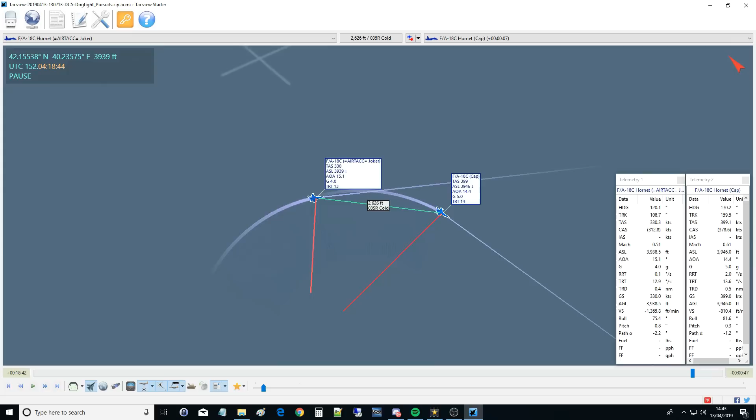Okay, offensive low yo-yo. From memory, I think Joker did this really well. So, the position is we are in a chase, 3,000 feet between us. He's about 80 degrees out of phase with me at the moment. He's struggling to get lead, to get the missile, or to get the guns. He's got to close that up, he's just out of guns range at the moment, basically. And let's send that on its way.

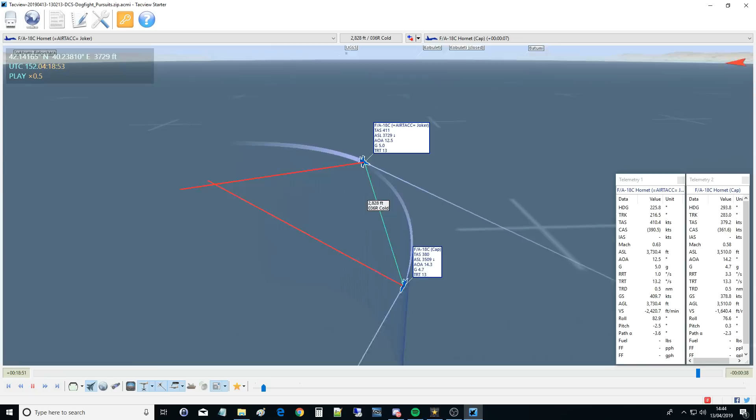So he's going to perform the low yo-yo. He's going to roll right, dip the nose down, unleash that potential energy into turn, and is going to be able to basically cut the corner. That's the way I like to think about it. And he gets the energy to cut that corner out of trading his potential energy for kinetic energy by diving. So there we've got the wing dip.

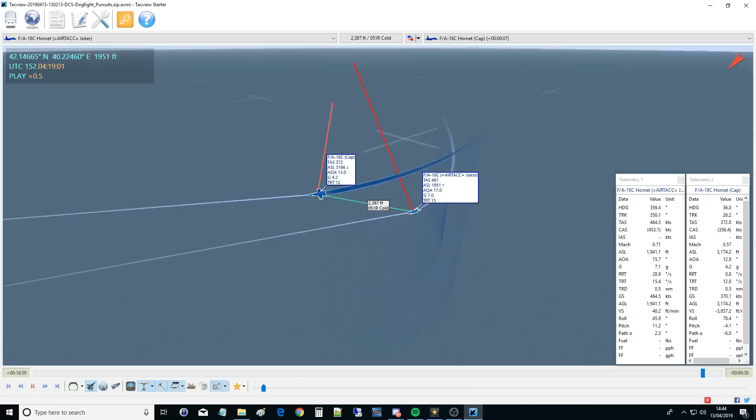Look at the altitude go down. Look at the speed increase, despite the fact that his turn rate has gone up. His turn rate's got all the way up to 22 degrees per second, and I'm stuck at my miserable 12 degrees per second. And he's going to pop up back onto the plane of turn. Like so. He's going to retrade that energy, going to gain that potential energy again,

and he's having to pull 9G here at this point to manage it, but that's just something you've got to do. He's gained all that kinetic energy, and he's got a bit of an overspeed on the go. But basically, that's now a guns kill at 600 feet away. So it's almost like magic. You kind of trade that energy in, and it allows you to close up so quickly. I mean, this was again a bit artificial. I'm not stressing my jet to the maximum here.

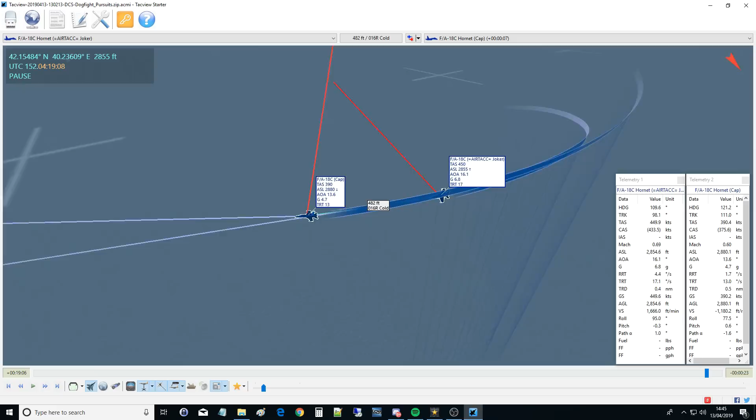I'm not doing a consistent 7G turn, but this is just an example to show how it can be done, and it does work obviously in a max G turn as well. So that's probably what we would consider the most useful out of all of the BFM maneuvers if you are the aggressor and you want to get closer in phase or just closer in terms of distance to your target to get your guns on cue.

Offensive high yo-yo. So if you like, it's kind of the opposite to the low yo-yo, but the mechanics work differently. So who does it? The aggressor. The condition is that the aggressor is fast and in a lead pursuit. Now, personally, I found that this kind of works in lag pursuit, and we'll show in a minute it working in lag pursuit with equal energy, but the official version is that it is when you have overspeed on the hostile.

So the action: the aggressor loosens the roll and pulls up to increase altitude. So because of that, we're obviously trading our kinetic energy, our airspeed, which goes down, but for what we lose in the airspeed and the kinetic energy, we gain in the ability to turn. And so we can turn all of a sudden and cut the corner. We're covering half as much distance as this guy here. And then when we dive back down, we can dive down much closer in phase, and only a few hundred feet, rather than the several thousand feet, back onto six.

And the effect is, despite a temporary lack of airspeed due to the much tighter turn, the aggressor is now closer to the defender and at more suitable speed. Again, because officially we're coming in from a higher speed for an offensive yo-yo. And this also is good for preventing a turning overshoot as well. So we're going to show an example of that and show that we can actually do it from a lag pursuit as well, but it's primarily for a high aggressor energy lead pursuit.

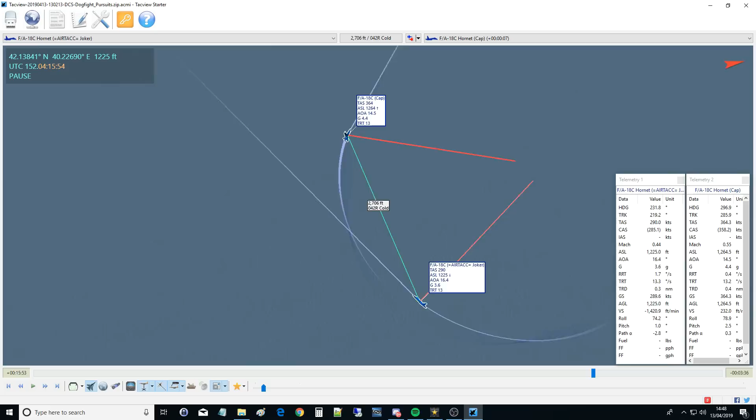So the situation is Joker is chasing us. He's the aggressor. We're about 70, 80 degrees out of phase. Nearly 3,000 feet between us. We're too far away and I'm too high energy, because we're just pretending I am, so that he can't get a lead and he can't shoot at us. So he is going to do his offensive high yo-yo. He's going to increase in altitude, essentially turn into the middle of the turn. And for what he loses in kinetic energy and speed, he gains more in the long run by being able to turn tighter, cutting the corner and lessening the distance he has to travel.

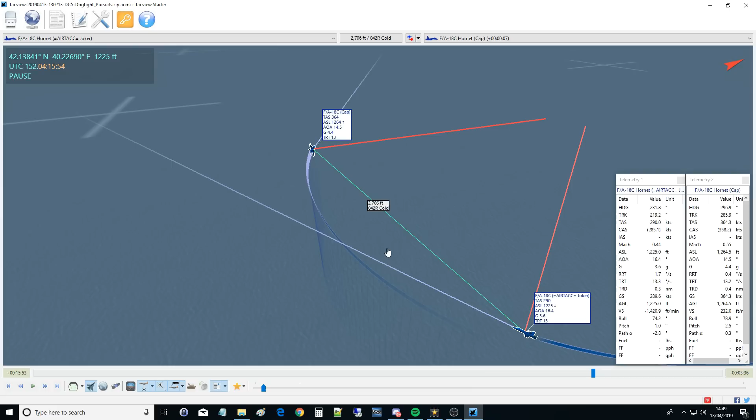And when he comes back down, he trades his potential energy back into kinetic. He's going to fall right on our tail. So a lovely maneuver. Basically just the opposite to the offensive low yo-yo. So let's set that going. So he's frustrated at the moment. He can't catch up. In fact, he's getting left behind. I know I'm only doing 4G, but it just makes it easier to show the move like this. In reality, we'll probably be doing a 7G or a 6G. So he's falling behind. We'll do it at some point.

There we go. So we're unloading some of that roll. We're up. And again, you may have to pull high G to perform this maneuver. And he's yo-yoed over. You see he's lost a lot of speed doing that. He went under 300 knots, and that's just what has to be done. And in he goes now. I did a little jig, a little roll there. I don't think that's needed. I think that was just an adjustment because he was slightly off phase.

2,000 feet, and he's going to have to load that jet right up now. So he's loading it up, loaded the alpha up, loaded the G up, and he's fallen on my back there. And so it's gone from 3,000 feet to 800 feet, a perfect gun solution, 10 degrees, 5 degrees within phase of me. So that's perfect. So if we were doing a full 7G turn, obviously it wouldn't have that much effect, but that shows a good example of how it works.

Right, so defensive spiral. This is a pretty cool one. Obviously, this has to be done at high altitude. Well, when I say high altitude, at least several thousand feet, at least kind of 5,000 feet, I'd say. Who does it? The aggressor and the defender. Now, technically, the defender initiates it and maintains it, and the aggressor is forced to go with it, basically, if he wants to carry on in the dogfight.

So the condition is the aggressor is on the defender's 6, and the defender has got himself where he's low energy, low speed, so he's down to 200 knots. And as the official saying is, out of energy, out of ideas. There's nothing else he can do because he's got no kinetic energy in the bird. What he does, however, have is potential energy in the bag. He has his MGH, his altitude.

So the action is the defender pulls into a diving helical spiral. So basically he keeps turning as he is, but he's gonna rudder his nose right or tighten the roll right so that he's now going 15, 20, 25 degrees down. And he's going to start trading in potential energy for kinetic energy. He's going to increase his speed, and this allows him to unload the jet as well because we can get speed. We can be sure that we can keep our aggressor sufficiently out of phase with the temporary increase in our kinetic energy. So using gravity for the turning energies, that's where it's coming from.

His aim is to keep the aggressor outside of a rotational shooting phase. So that just means keep the aggressor out of phase. Keep him, you know, plus 50, plus 60 degrees out of phase if you can, up to 180 degrees. The effect is the aggressor cannot acquire a shooting solution. He just has to follow him down. There's not really much he can do apart from follow him down, because he can only get the same amount of turning energy from the dive as well. And the situation can be reversed, yes, I'm aware I can't spell, depending who reaches the ground first.

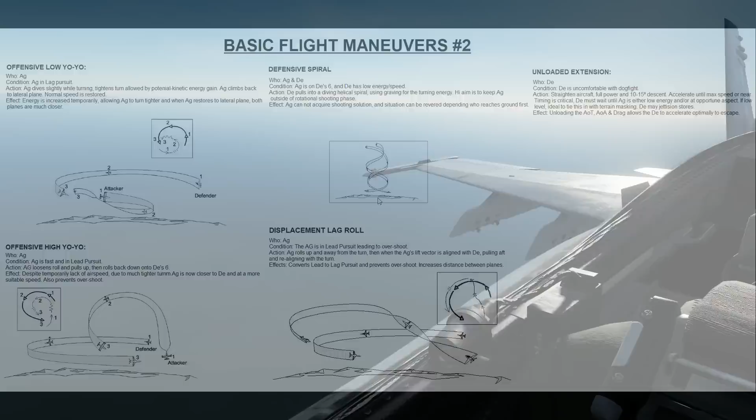I'm the defender, Joker is the aggressor. He's got onto my 6. We're going to have a fake dogfight up here. I'm going to deliberately run myself out of energy and out of ideas. My only thing left to do is to get myself in a defensive spiral where I'm going to use gravity to keep us separated, keep us out of phase so we can't get a gun solution on me until we basically hit the ground and are forced to split. So I'm going to go burners on in right, pull 3, 2, 1 now. I'm going to load up the alpha so that I run out of energy.

Okay, oh, I'm all out of energy, I can't maneuver. So I'm going to put myself in my downward spiral now. Use gravity to help build up the energy, even at the same stick load. And I'm keeping him out of phase so he can't get the shot on. Altitude. We've just got to watch for the ground now. The ground is going to force us to split. 1,700, 1,000. And I'm out of here.

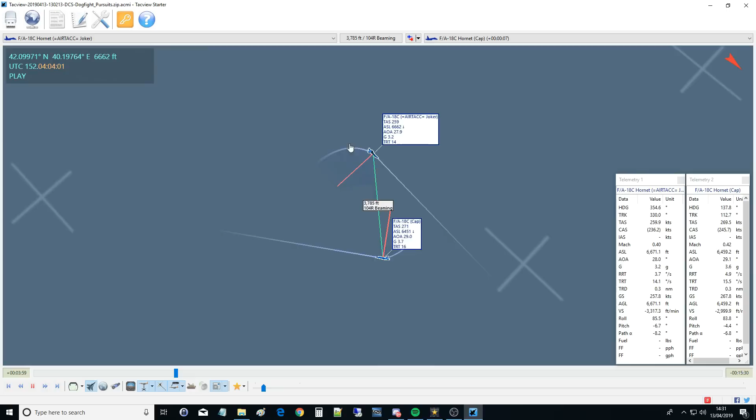Okay, so the defensive spiral. So we're in an artificial dogfight at the moment. We're about 150 degrees out of phase, 120 degrees out of phase. He's behind me. So I've got no hope of surviving this dogfight, and I've bled myself out of energy. I'm down to 265 knots. Don't worry about Joker too much. He's just trying to follow me for this example, but he is representing the threat. So I've loaded up too much alpha, and I'm out of energy, I'm out of ideas.

So what I'm going to do now is put the nose down 15 degrees, or maybe more than that. We're going to use gravity, and we can afford to unload. Because we've got the gravity, we can afford to unload the plane slightly here. So we're going to unload the alpha, increase the speed up to 350 or maybe even 400, we'll see. And what this is allowing me to do is unleash potential energy, put it into kinetic energy, and it essentially allows me to keep Joker out of phase. It doesn't allow him to get a solution.

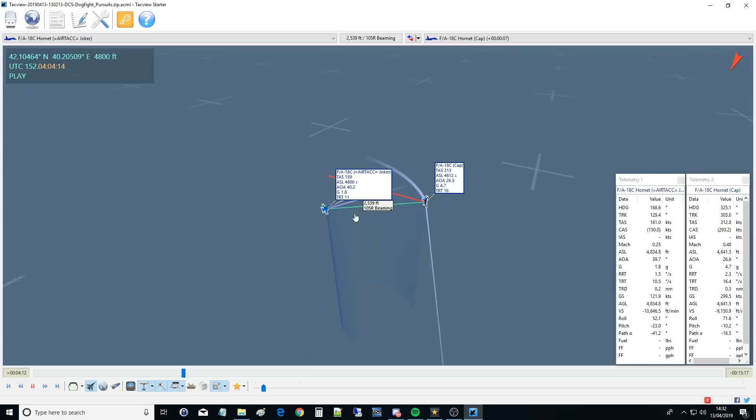Look at him struggle, just trying to keep a lag pursuit on the go here. And he's burnt himself, in this case, all the way down to stall speed. Whereas I've unloaded down to 26 degrees alpha, and my speed is still increasing. Joker's getting his act back together now.

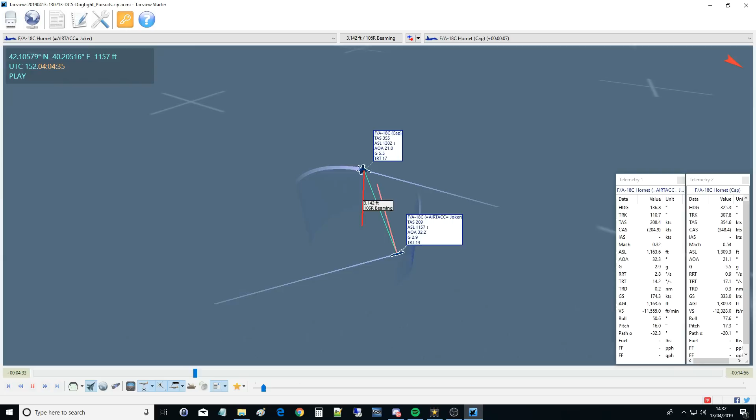It's about 180 degrees out of phase now. So it's a bit of a mistake from Joker for going so slow, but we're not really worried about his bird too much. It's my bird that we're really looking at the moment. So for that whole spiral, I'm not trying to get away in that spiral. I'm just trying to neutralise the hostile.

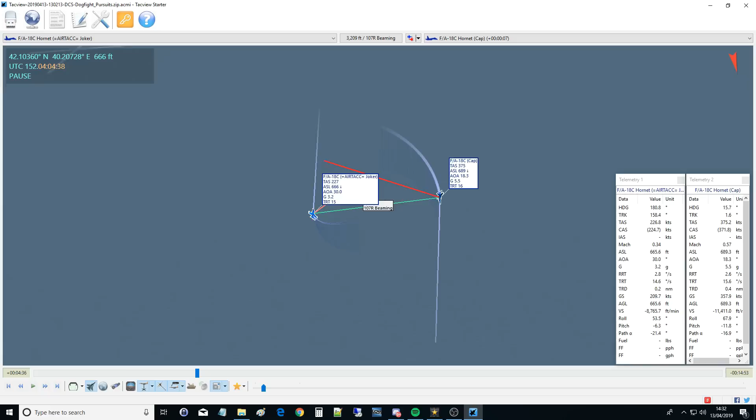Whatever we do, he can't cut in front of me there. He can't really get a lead pursuit on me as such. Can't get a weapons fix. And then we come to the end of the manoeuvre, and what happens is, because we reach the ground, we run out of altitude and hit the ground at different times because we are out of phase here. It means that I've got a chance of getting away. I've got a chance of unloading my plane and getting away. And because he's out of phase, he doesn't have that chance to catch up.

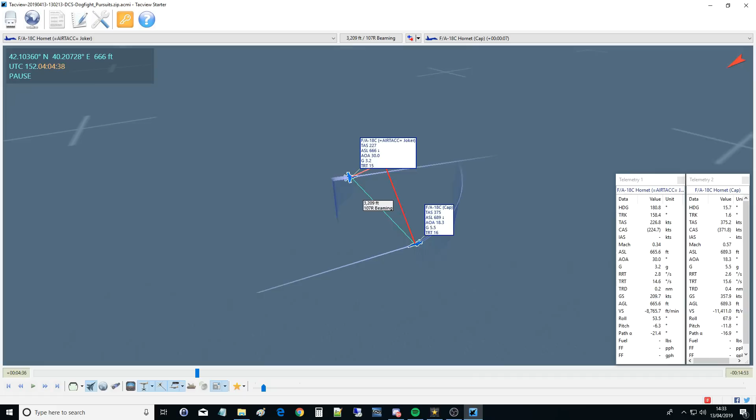I can't really explain it any better than that, so we're just going to have to watch. So we're more or less 180 degrees out of phase. I hit the ground. I'm burners on. I unload the aircraft completely. And that's me in such a fast jet accelerating up to 500 knots. And look how we convert 180 degrees of dogfight into 2 miles.

And there's nothing Joker could have done about that. He has to abide by the same rules as me, and that's the end of it. He's out of Sidewinder range, he's out of gun range, unless he had a medium range missile. There's nothing he can do at the moment. So we've got rid of him by using our defensive spiral.

Displacement lag roll. This is one of my favourites, especially when you get it right. Very satisfying. Who does it? The aggressor does it. The condition is that the aggressor is in lead pursuit and closing on the defender fast with a possible overshoot about to happen. So this is the defender here. He's in his turn. We are closing up on him on a lead pursuit and we're closing fast.

And usually displacement lag roll is only something we do when we've got an aggressive overshoot of 150 knots or something. Not if you're just a few knots faster. In that case, you could just deflect the elevation downwards to get back into lag pursuit. And this is just a quick, aggressive method of getting us from lead pursuit into lag pursuit.

The action: the AG rolls up and away from the turn, and when the AG's lift vector is aligned with the DE, then pulling aft and realigning with the turn. So what we're going to do is a full 360 degree roll. And once we've completed our roll, backstick, and just the way the mechanics works, I don't really understand, we're going to resume the fight several hundred feet behind and in a lag pursuit.

So it's a way of burning off that speed without losing the pursuit. The effect is it converts lead to lag pursuit, prevents overshoot and increases the distance between planes. So that's it. We'll go and give it a shot now. Right. I'm going to pull lead now on purpose. Catch up. So I'm closing. I'm about to overshoot. So I'm going to roll out into lag, recommit, and now back in lag.

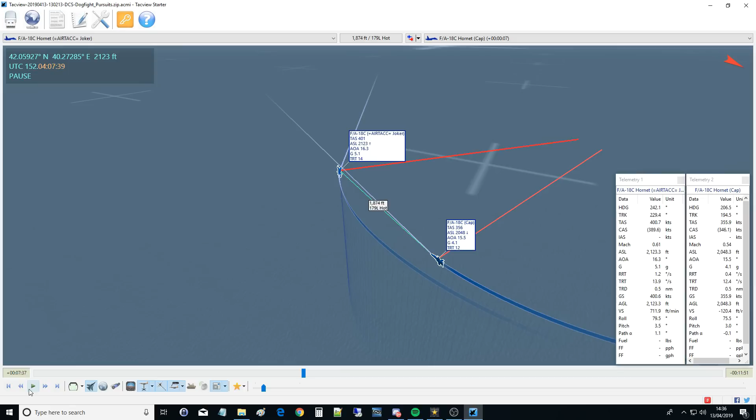So I'm behind, Joker is defending. We've currently got him in pure pursuit. I'm probably going to pull lead here to lead pursuit. So let's see that ADL increase.

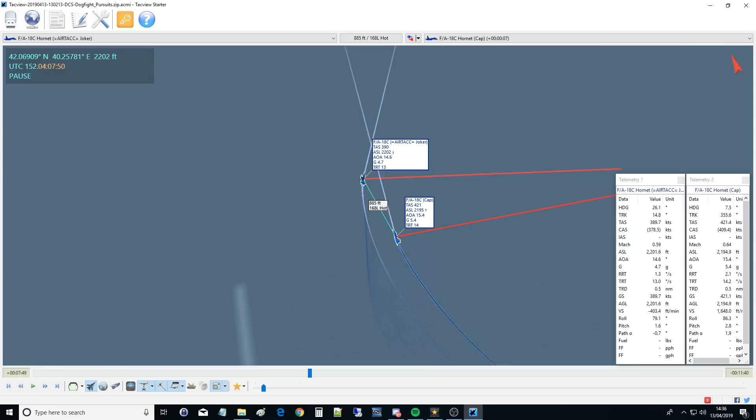Yep, you can see that I'm moving forward of his plane now, and that means we're going to close up in the lead pursuit. So I'm down to 1400 feet, putting more lead in there, 1200 feet, 1100 feet, 1000 feet. And the problem is I'm going to overshoot now, so I'm in a world of pain. I'm down to 800 feet. I've got bucket loads of lead pursuit here.

So what we're going to do is I need to convert this to lag as quickly and aggressively as I can, and just moving down in deflection isn't going to be quick enough. So I'm going to do a full left-hand roll out of phase and then back into a lag phase. So watch this. If I do it, so I'm 700 feet and panicking, a full roll left and then back into lag. We're going to have to do a lot of pull here to get that back.

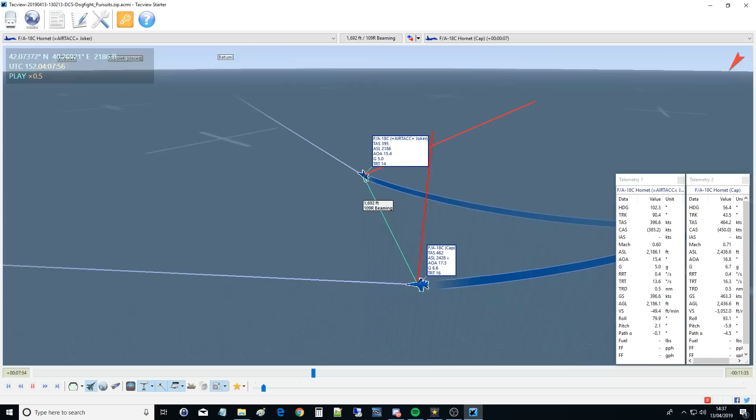But essentially, I'm back in lag now. I'm 3,000 feet back. What we found is that, unless you're really good at doing that roll, which we're, well, not, it dumps you back a good couple of thousand feet. So you'd only do it if you were really closing. I wasn't closing particularly fast there, but if he was doing 300 knots and I was doing 500 knots during the closure, then we would do it. And that would probably take this down to about 1,000 offset rather than about 2,000. And then that's me back in lag there, basically, rejoining the fight.

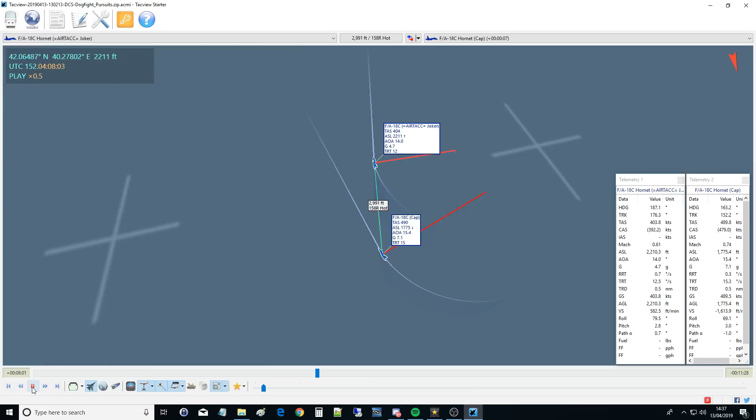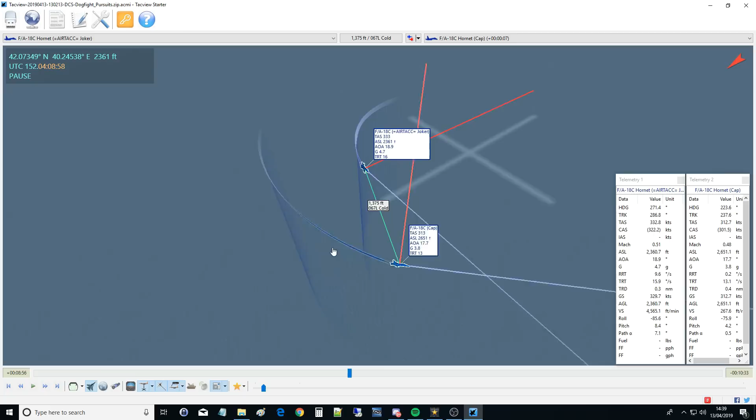Okay, let's see Joker's go, see if he does it any better. Joker's following me now. Lag to lead. Big closure rate. 2,000 feet. 1,000 feet. So this is more like the closure rate I guess you'd use it at, although it was a bit... oh, hang on. Did he complete a roll? Let's just have a look at that again. I think he might have cocked that up. Let's just slow that down. So he rolls over... he just... oh! No, that's not how you do it.

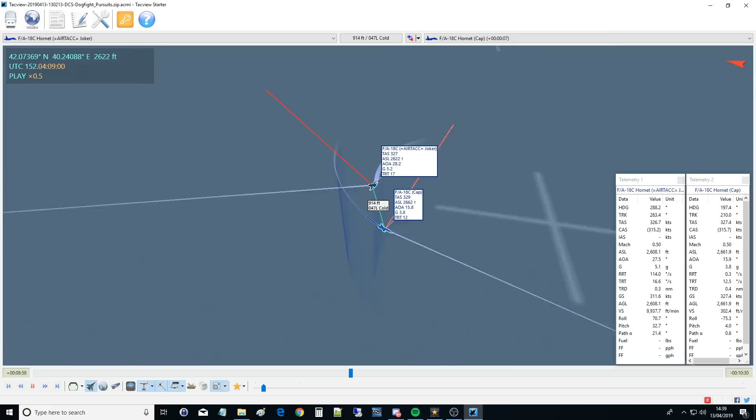Ah, right. So I think Joker a bit misunderstood that. What you're going to do is a full 360 degrees of roll, not a reverse roll. You can see he reverses here. 90 degrees right, then 90 degrees left, and that's what's put him way out of whack there. Obviously, I couldn't see him doing this, so I didn't know. And that's put him 5,000 feet behind. And let's just go back and look at my example again.

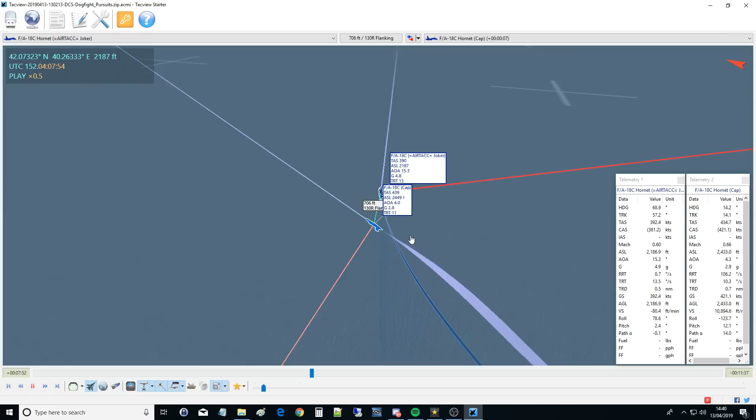Okay, 700. Let's just speed up a little. Now watch here, there's no roll reversal, it's just a full 360 of roll here, and just because that puts us out of phase slightly, that does enough. So we don't want to do the roll reversal. Full roll like that, back on the aft stick, load the jet back up, and then you're back in phase that way. So, okay. That's all we've got to show on that one.

Finally for today, the unloaded extension. So we've talked a lot about the position of the aggressor and the defender in a dogfight, how to defend, how to attack, how to maintain a pursuit. What we haven't really talked about, apart from the defensive spiral, is how to break a pursuit. And it's the unloaded extension. That is just a fancy word for running away. The key word is unloaded. You are unloading your jet.

So who does it? The defender, obviously. Well, maybe not obviously, but the defender, the guy who considers himself in trouble. Technically, I suppose an aggressor could do this as well, but it would be much easier for an aggressor to do because he's obviously aggressing. He can basically just turn away from the defender and run. Much harder for a defender. The condition is that the defender is uncomfortable with the dogfight. Well, to be honest, any defender is uncomfortable with the dogfight.

If a defender wants to carry on the fight, then he's going to aim for the overshoot to get the aggressor in front of him. If he just wants out of the fight, maybe your jet isn't as good, maybe you've got heavier stores, whatever, you want out of the fight, then we're going to look for unloaded extension, or maybe unloaded extension in combination with forcing an overshoot.

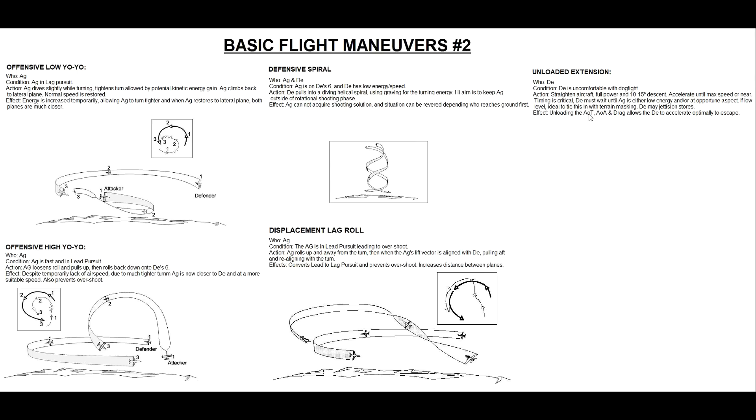Now, we're probably not going to get out of medium range missile range. I've tried this lots, even in a fast F-15, and I can't get away from a Flanker or something in terms of medium range missile. So that's about 4 miles on the rear. But you can get out pretty much out of ACM at least. So let's go and give it a shot.

Right, so I am in a Viggen, Joker is in a Tomcat. We're going to do an artificial overshoot. And at an opportune moment, after we've merged, then I'm going to run away. So when you want, Joker, pass and go into initiate a fake scissors. Let me know when you're passing so I see you. Copy, I'm about to pass on your right side. Roger. And passing. Roger. Chasing him.

I'm taking this opportunity to get the hell out of here. Unload. 15 degrees down. See you later, sucker. He can't catch up. He can't catch up. Woo. Oh, something crashed.

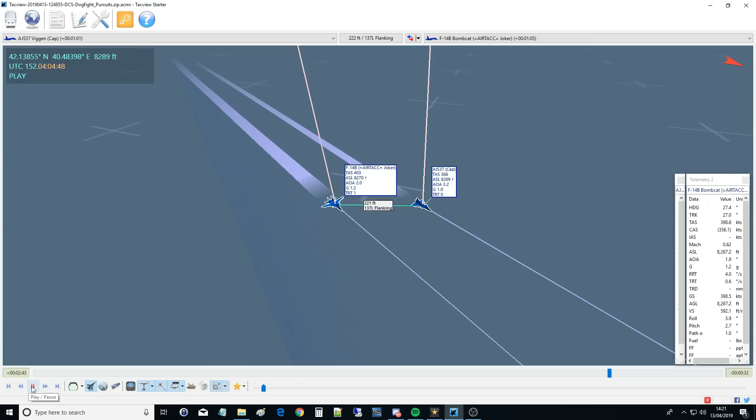Okay, so I'm just about to cause the aggressor to overshoot. High G barrel roll, whatever. I've done something to cause him to overshoot. Past he goes. He's going to immediately high G turn to try and bleed off speed. So I'm going to fake going into scissors here. So I'm turning into him. He reverses. So we're going to do our crossover. Now he's completely fooled that we're going into scissors at this point.

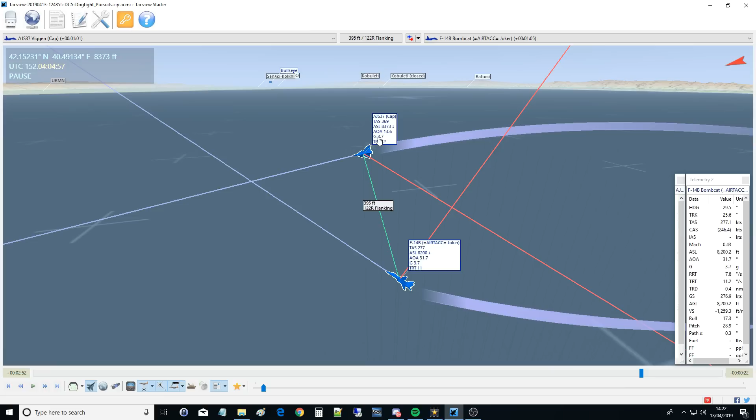And so he's looking to reverse. And if anything, he's reversed pretty early here. So he's got a massive advantage really at this point. Usually he would be turning tighter away. And then so at this point we're going to unload our planes. Let's just scoot back up there. So the peak of our turn, we're about 4G, and 14 degrees angle of attack, so that's not very aggressive.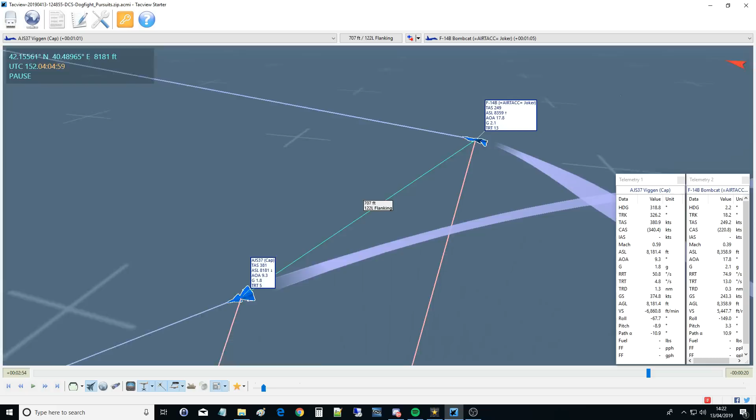I'm trying to keep my speed up. I'm full power. Whoops, I just realised that is tucked away. So you can see we've got full burn on now. And already I'm up to 400 knots. I'm going to level out. I'm unloading the G. I'm unloading the alpha. And Joker's now got to turn 180 degrees essentially to get on me. And we're widening that gap now. So everything's unloaded now. 15 degrees or 10 degrees of descent.

I can't see it written anywhere, but roughly 450 knots. There's very little Joker can do to get energy in his bird to chase now. On 0G, 1G, but 0 essentially. 500 knots. And Joker's just completed his scissors turn back, and he's trying to work out where the hell I am, and here I am. So he's going to turn into me now. It doesn't tell you his state, but I'm presuming he's on full burn.

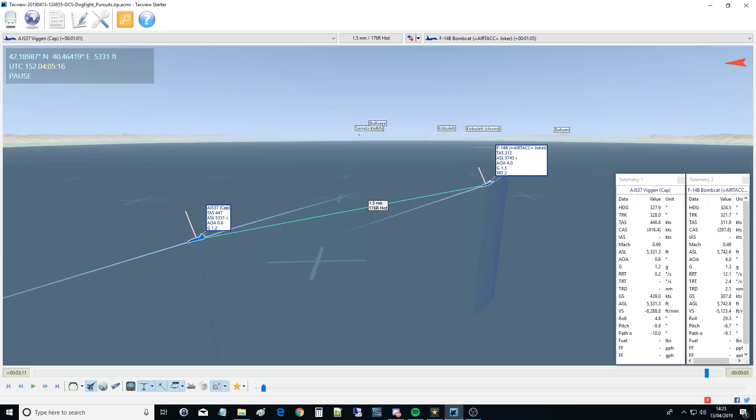And I'm already at 600 knots, 1.3 miles. He's finally starting to increase his speed now, 300 knots and so on. And that's it. I think it crashes there. Let me just zoom back before it crashes. So even before it crashes there, I'm at 1.5 miles, 640 knots. He's just getting speed back in the bird now after he's completed his turn and located me. And so we're almost already out of Sidewinder range.

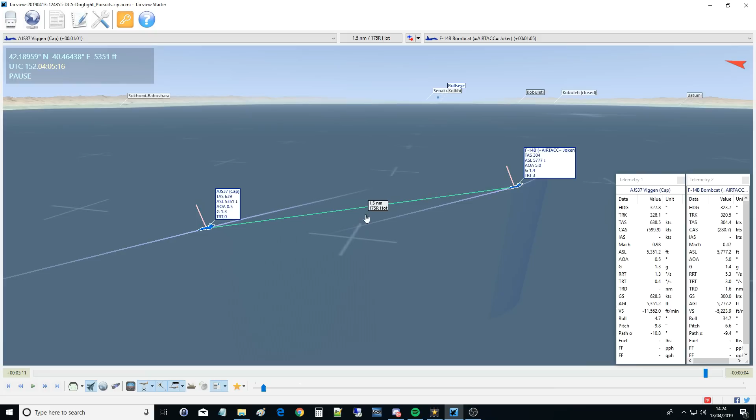Now we're never going to get out of medium range missile range, AMRAAMs and R-27s and whatnot, unless there is some terrain to hide behind. But we can get out of the dogfight, out of short range missiles, and out of gun range by doing that. So that's how we're going to want to do the exit.